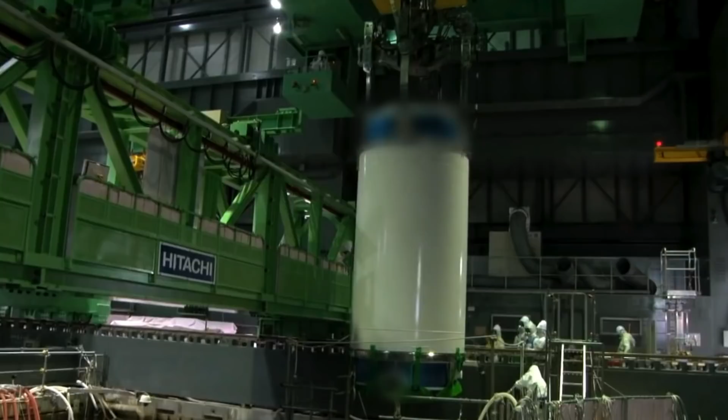That same type of reactor exists in maybe 23 other places in America alone. So you don't even have to film it there - you could film it in America, or in Japan, which has a bunch of them too. These GEs are all over. You could make this film almost anywhere.

And then, green screens. CNN is like the green screen king. Anderson Cooper has done green screens before, and they've been caught. So it's really hard to believe things you see, especially with people in places.

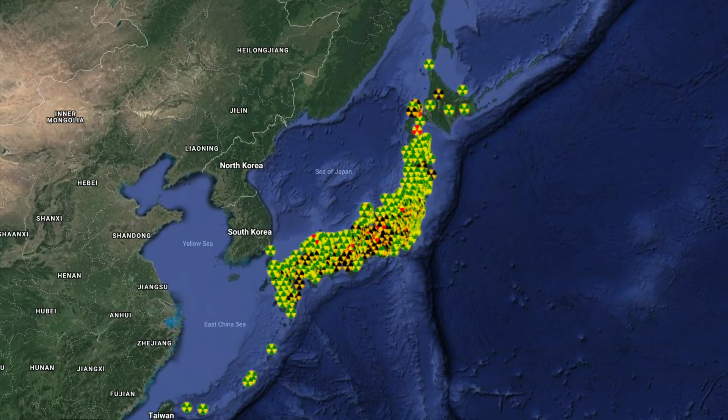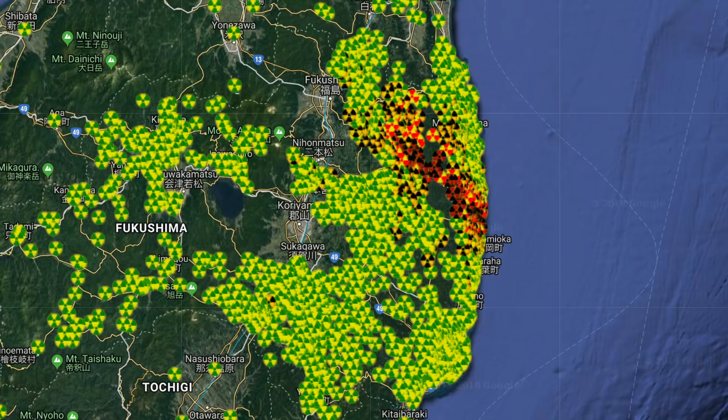The place exploded and blew up. When you have that type of meltdown and disaster, you're not going to go into it right away. They're still cleaning the place up, and there were all types of temperatures and different isotopes involved. They picked up isotopes miles and miles away from Japan that would require Celsius scales of 4,800 degrees - we're talking full-blown meltdowns, not to mention all the alpha and beta particles, even the low-temperature isotopes, which blew all over America. They just happened not to test the sensors until their half-lives were over, because they all had short half-lives.

So I have a hard time believing they're actually in that reactor. I believe it's either green screen, or let's say they made a mock-up and fixed it - why would they do that? There's no reason to set that up with fake fuel rods. Seriously, fake fuel rods - they're not going to do that. They'd just go to another room.

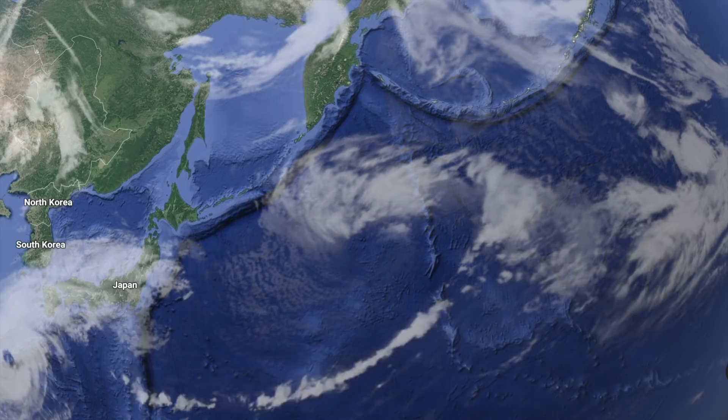These producers and news people have no empathy. They're paid to say certain things, and if they don't say what they're paid to say, they won't have a job. They say what the teleprompter tells them, and they have no problem with that. So I have a hard time with some of the footage on mainstream media.

Actually it doesn't even matter - I think what they're trying to do is distract you with this. The real problem isn't this at all. The real problem is that the place was built into a hillside. Seriously, who would build a nuclear reactor facility at sea level? You have to be kind of a moron to do this.

All that water's coming through that mountain - where do you think it's going? Underneath it. And what's down there? A bunch of melted cores. These things are melting, and the water's getting radioactive. The fish are all dying.

They don't report on all the dead whales. This week alone, there were a couple hundred dead whales in New Zealand. What about the 10,000 dead sea lions? Nobody talked about them. They don't show you all the dead fish, the die-offs, and I'll bet there's hardly any fish near Fukushima. Millions of gallons of radioactive water are continually seeping into the Pacific.

That's the real problem. And another problem is that they totally annihilated us with a plume - a gaseous radioactive substance that dropped all over America that they didn't even properly monitor. Half the monitors were turned off, and the mobile monitors just happened to be in the shop.

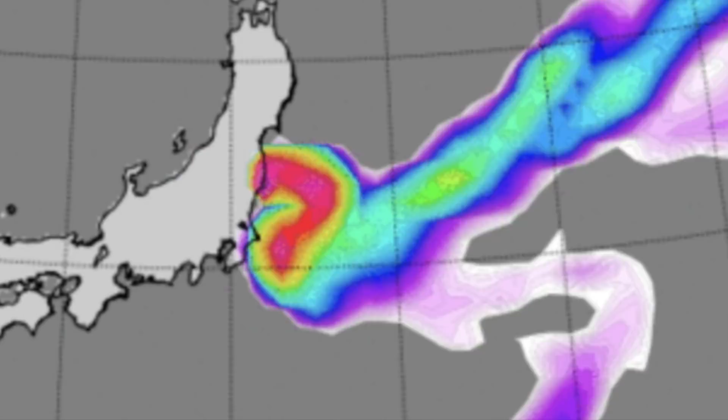And then they took out all the filters, and these filters were actually picking up the alpha and beta of iodine, plutonium, and other isotopes with half-lives of 30 to 60 days. They didn't test those until like 6, 8, 10 months later, when there was nothing left of the isotope. In the meantime, our cows ate the food, we drank their milk, we ate their food, because it all dumped on us.

That's the real problem - it's not this reactor TV show they're showing us. The real problem is that it's destroying the Earth right now, destroying our ocean right now. We were test specimens in 2011 and 2012, and all of America and Canada were hit by alpha and beta radioactive radiation that damaged us. That is the real issue.

As far as the rods, seriously, a lot of things could have happened. Number one, they could have just totally vaporized. They found certain isotopes that require 5,000-6,000 Celsius degree temperatures miles and miles away, so they could have just vaporized. By the way, when they vaporize into a gaseous state, a lot of these sensors we have all over, especially in America, don't pick up the radioactive gas. They pick up the particles that actually hit them. So it could have vaporized, okay?

And if it didn't vaporize, then they melted. If they melted, where are they? Well, they could be in the earth melting right now. There could be this big, massive glob of metal, radioactive substance that's trying to be cooled down by millions of gallons of water coming from the mountain, because these idiots put a nuclear power plant at sea level that cut a mountain out. All that water's going underneath, killing the fish like we talked about. So that's where your rods are at.

What do you think, they'd put them somewhere into another reactor? Well, if they did, they would say we're storing them temporarily. I mean, they don't even have any room to store stuff. Why do you think there's 31 million bags of 1-ton bags all over the country? If they had room to store rods, they'd be on site. No, man, these rods are gone. They've been vaporized, or they're in the ground melting, or they're hiding them somewhere and basically killing people with the radiation. Have you seen how many people are working there? I hate to see the death rates 10 years from now from all the workers there. It's insane.

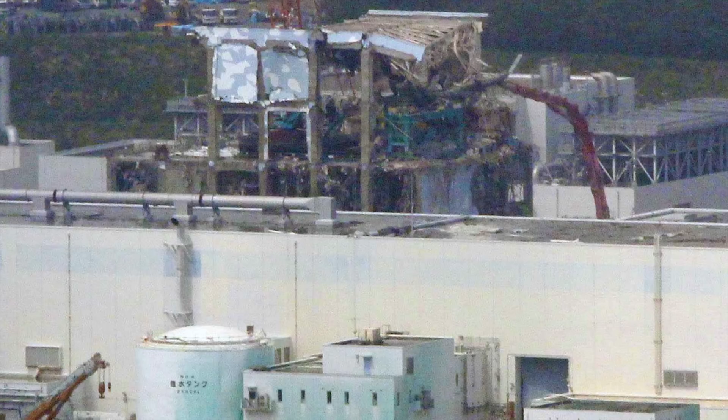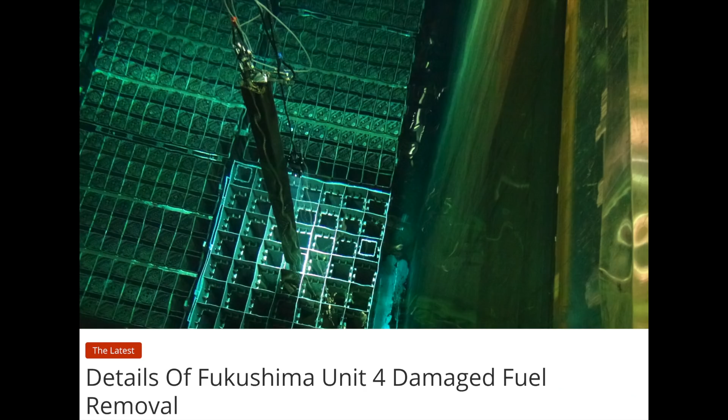It's insane. There were hydrogen explosions at reactors number 1 and number 3, and there was a fire at reactor number 4. There is no mistake that this is a level that can have an effect on humans. A fourth reactor is also right now under concern. This reactor was shut down at the time of the earthquake. What we believe at this time is that there has been a hydrogen explosion in this unit due to an uncovering of the fuel in the fuel pool. We believe that secondary containment has been destroyed, and there is no water in the spent fuel pool. Let me assure you, the situation is under control.

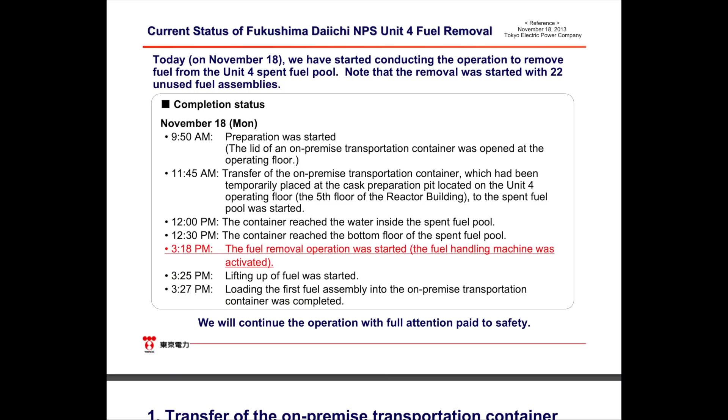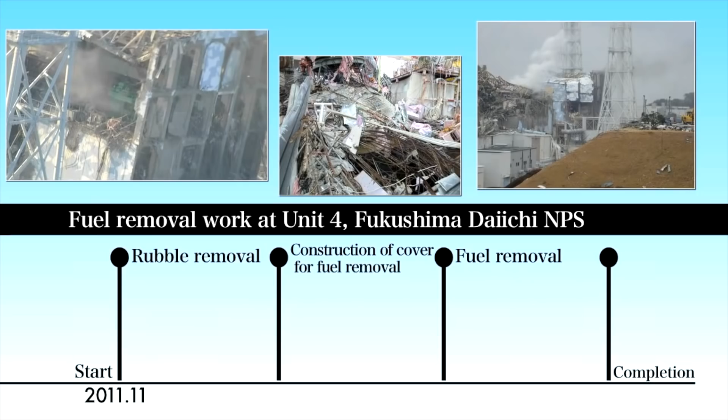December 1st, 2018. This video is called Fukushima Unit 4 Spent Fuel Pool Charade. Now, the reason why I call it a charade is, just look at the definition. All I gotta say is, do you believe TEPCO, or don't you believe TEPCO? I don't believe TEPCO. And if you don't, then I ask the question: if the spent fuel pool caught fire, even a little bit, how do you pull out spent fuel rods that were on fire? Wouldn't they be stuck together?

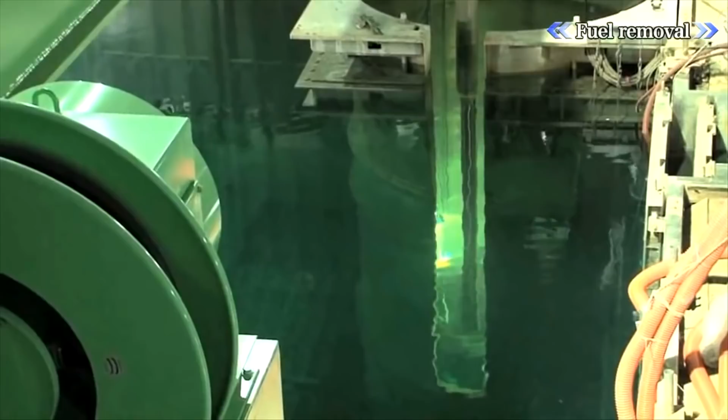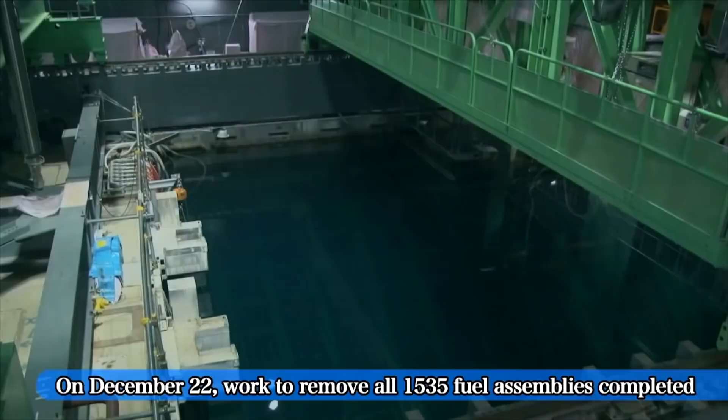Now, they say 100% of it went up into the air, according to the censored report. Now, if it's all gone and burnt up, why are they saying that they pulled 1,500 of them out? And if they did, where are they?

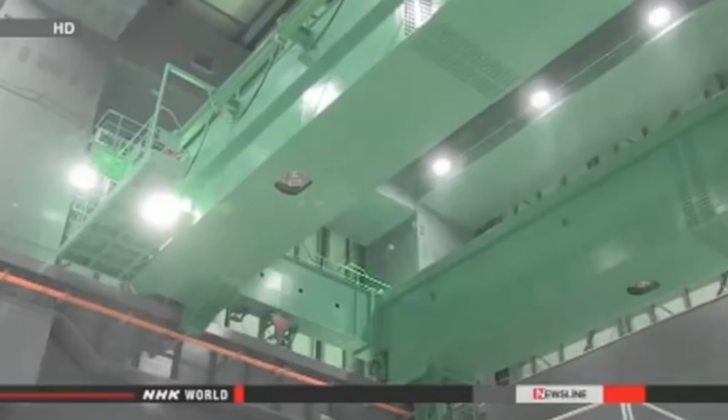Workers will begin removing fuel rods on Monday at the Fukushima Daiichi nuclear power plant. This is the first critical step in what is to become a decades-long decommissioning process. Tokyo Electric Power Company workers will launch the operation from the number 4 reactor building. There are more than 1,500 assemblies of fuel rods in the building. Most of them are used and highly radioactive. The building was damaged by a hydrogen explosion in March 2011. The workers will use a crane attached to a specially built structure. Each worker is only allowed to work for 2 hours a day because of the high radiation levels in the building. A manager told NHK World that TEPCO is confident the operation can be carried out safely. The same operation has been conducted more than 1,200 times at nuclear plants, including other facilities. We're not trying anything new. Experienced workers will do what they have been doing for years. TEPCO officials say it will take more than a year to remove all the fuel rods from the building. The workers will then have to remove the fuel rods from 3 other reactor buildings. They estimate that the entire decommissioning process will take up to 40 years.

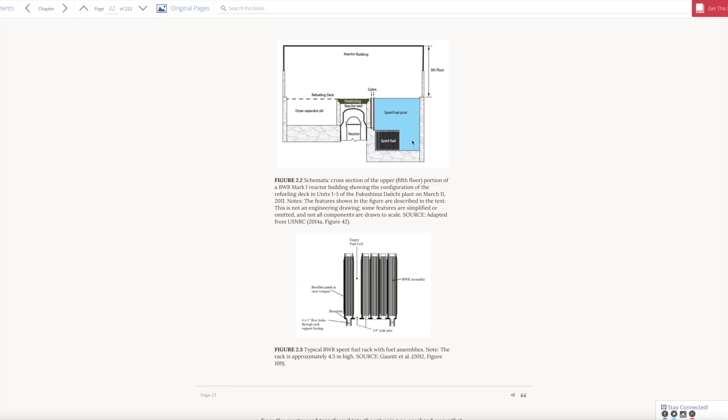It states that TEPCO did not provide enough technical documentation for its water level estimates in the Unit 4 spent fuel pool to enable the committee to evaluate whether those estimates are realistic. In particular, there was insufficient information about the methods used to establish water leakage around the gate seals and total volume of leakage from the pool. These leakage estimates are critically important for obtaining realistic estimates of pool water levels.

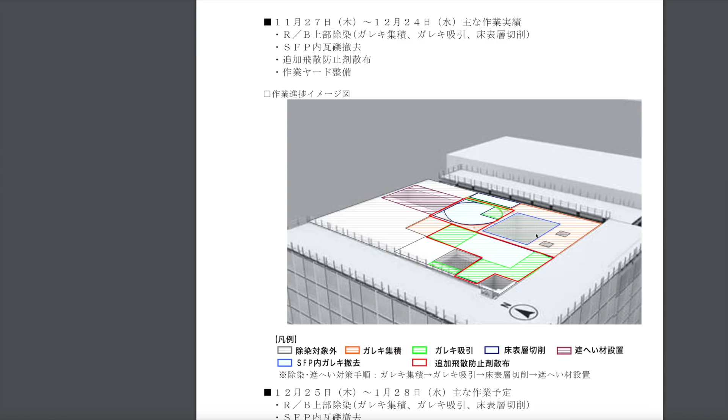This is their image of June 29th, 2011 of that spent fuel pool. This is the location of the spent fuel pool. This is headed north. Right there, every wall in the whole building is blown out.

International Atomic Energy Agency, on March 15th, 2011, was informed by the Japanese authorities that the spent fuel storage pond at Unit 4 of the nuclear power plant is on fire. They're stating it's on fire, the storage pond.

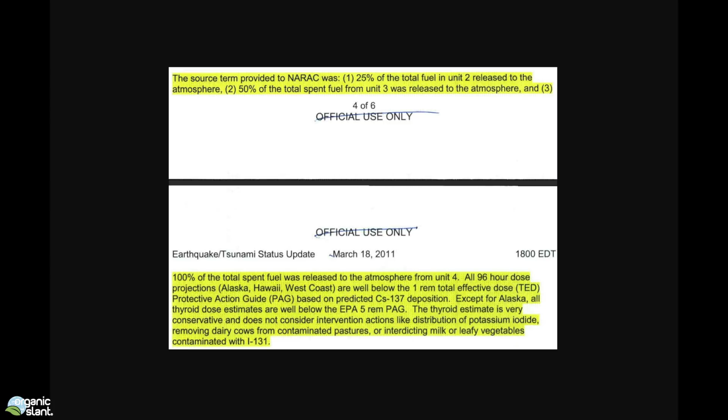According to a now declassified report written by the U.S. Nuclear Regulatory Commission on March 18th, 2011, one week after the tidal wave hit Fukushima, they're saying that 25% of the fuel in Unit 2 was released, 50% of Unit 3 of the total spent fuel was released, and 100% of the total spent fuel was released to the atmosphere from Unit 4. Now you know why there's so much confusion over here. All these documents are saying that the spent fuel storage pond went up in fire. It caught fire. That thing would be burned to bits.

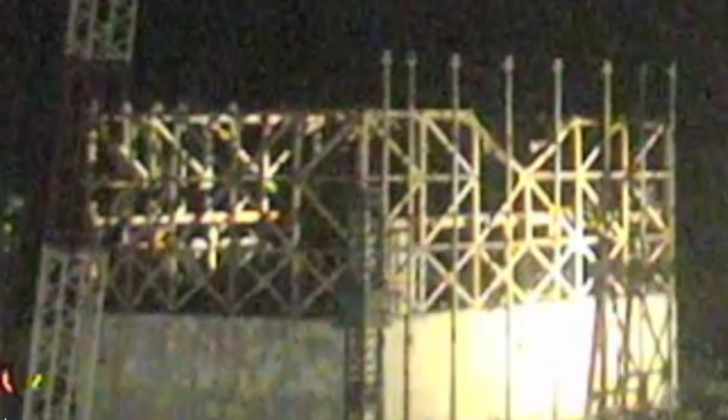Reactors number 3 and 4 had low water levels. Spent fuel pools are of significant concern. Reactor number 4 had 135 tons of nuclear fuel in it. March 15, 2011, fire in the spent fuel pool in Unit 4 at Fukushima 1.

In the early morning of Tuesday, 15th March 2011, the International Atomic Energy Agency released a statement saying that the Japanese authorities had informed the agency that the spent fuel storage pond at Unit 4 of the Fukushima Daiichi plant is on fire and radioactivity is being released directly into the environment. No nuclear fuel was in the Unit 4 reactor on 3/11.

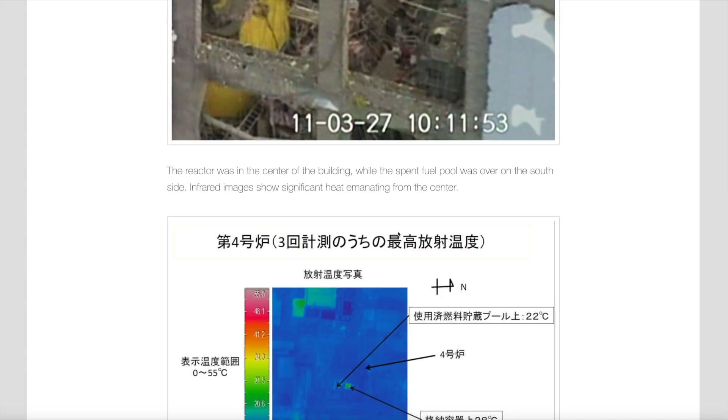Now, this person is saying that there is evidence that it was full of fuel at the time of the explosion. Oh look at that, that's a doozy. Now, this is the only theory I've ever heard of this.

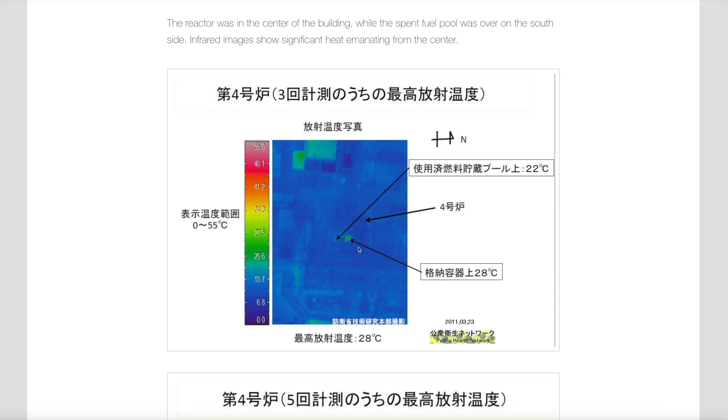There is the hot spot right here. Now, the fuel pool is more towards... that's what this person is trying to say, that...

I have confirmed that there is no fuel in Unit 4 pool, even the U.S. military. Concern is that Unit 4's pool has been dry for a really long time. If it hasn't done it already, it'll eventually melt through the concrete floor, drop down, hit the Torus, possibly steam explosion.

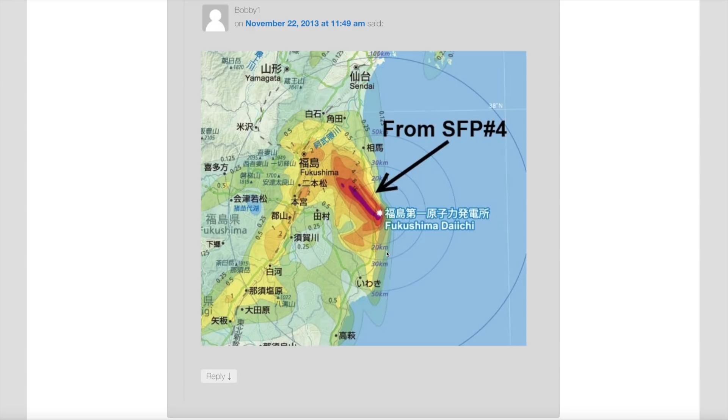Now this is really interesting. I found this tweet that says even the U.S. military has confirmed that there is no fuel in Unit 4 fuel pool. Now, I don't know what that means.

Now, if they mean no fuel, does that mean that it's all burned up? Which is reported - reporters who questioned the transparency of the water in Unit 4 pool as unusually high at the TEPCO interview. Well, they just keep repeating it. Does that mean the IWJ was also taking a farce shot? Unit 4 spent fuel pool.

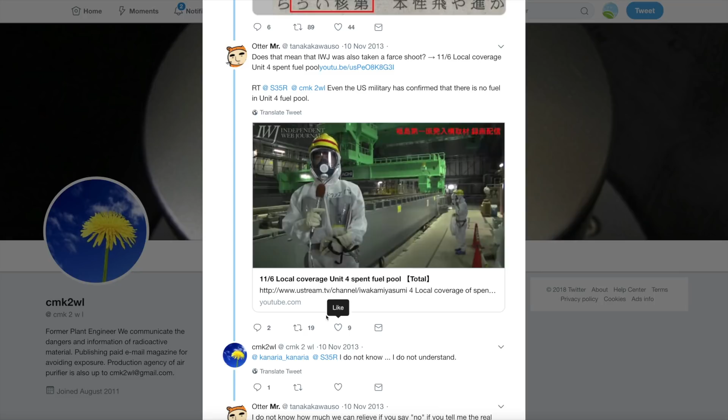I don't want to yell here, but this is weird, this is totally fake. If you look at every video of them going into Unit 4 - Leslie, all of them, the Cecilia Vega, the BBC guy - you look at every one of those, watch what happens. They always go to the floor, and then there's the shot that opens into this number 4 building. Now, I've never seen this video before, but this totally cements it right now that it is a farce, and I will show you what I'm talking about.

Watch. When they go into the building, they go right down to the floor, and voila, then they're there. Watch this. That is so staged, it's pathetic.

Alright, now this is the mock reactor then. I am believing that this is the mock reactor, that even the BBC's Rupert - he says that they built the top in 6 to 9 months. So why couldn't they build this in 6 to 9 months? The whole fake reactor.

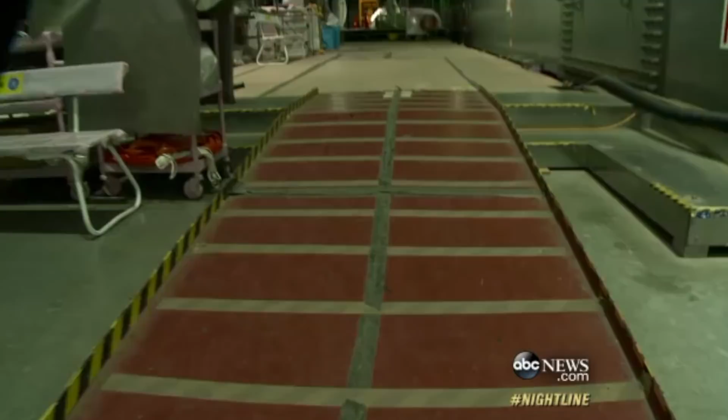Don't you find it bizarre that all the reporters follow the same protocol? Now watch Cecilia Vega - the camera goes down, and then they appear inside. Every video shows the same way into the building and out.

And now I understand why, because Unit 4 does not contain anything. Even listen to what they say throughout this whole thing - they say that the levels are not as low in 4 as the other 3. That's because there's nothing in there.

We're going to go inside and see what kind of progress TEPCO has made on this cleanup. We're inside the building for reactor 4.

Now look what happens when she goes into the building. I think they're using a different camera too - look up in this part right over here. Something weird is covering the lens. This is not - they're not going to use the same camera, so something is a little bit fishy with that. Watch.

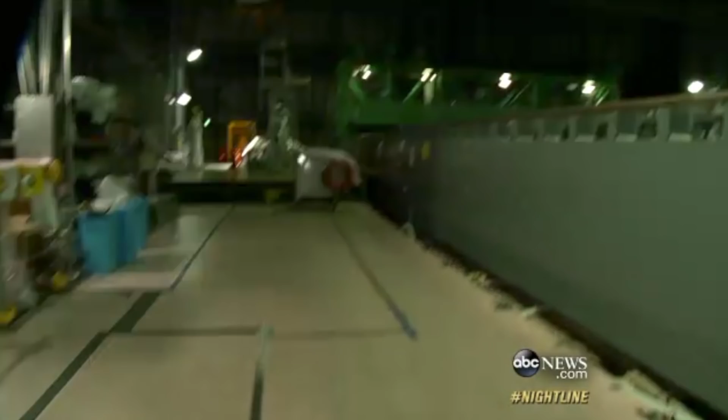See this up in here? This black part? Something's fishy.

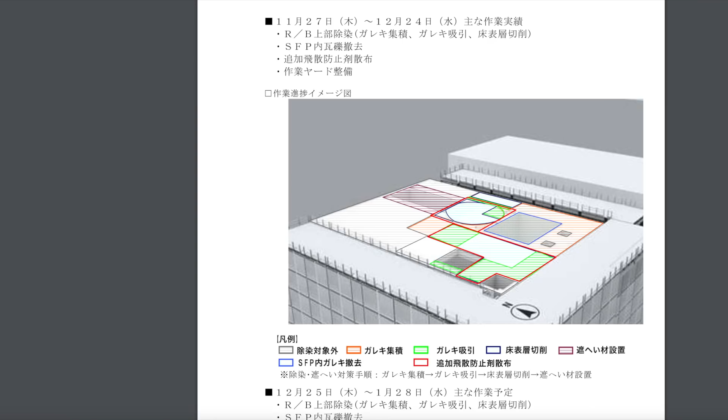TEPCO says another fire burning at Unit 4 on the northeast corner. Helicopter being prepared to fight the fire. Okay, northeast corner - north, south, east, west. Northeast corner is right in here.

State Department has confirmed fire on Unit 4. TEPCO is saying they haven't yet started fire extinguishing the Unit 4 fire. Fuel rods have been exposed and generating hydrogen in Unit 4. Some of the roof is damaged. 30 rems an hour in the area, so it's difficult for personnel.

TEPCO is saying they haven't yet started fire extinguishing number 4. Fire on Unit 4 is being reported as fire that may have initiated due to hydrogen gas from low levels of water in spent fuel pool. No indication what is burning. Media indicates fire started and being reported by a TEPCO person that they are not taking actions to extinguish it at this time due to dose rates in the reactor building. Fire about 5 hours ago in Unit 4, low in the reactor building.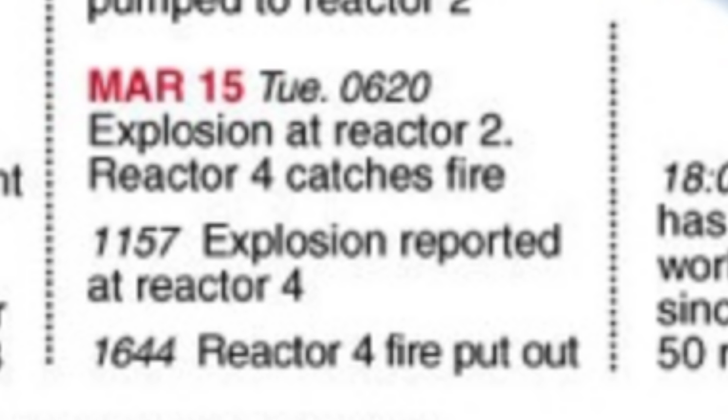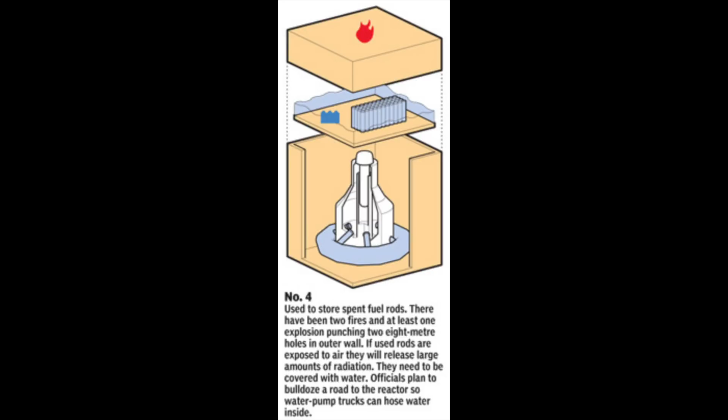Long-lived radionuclides, such as cesium-137, are something new to us as a species. They did not exist on Earth in any appreciable quantities during the entire evolution of complex life.

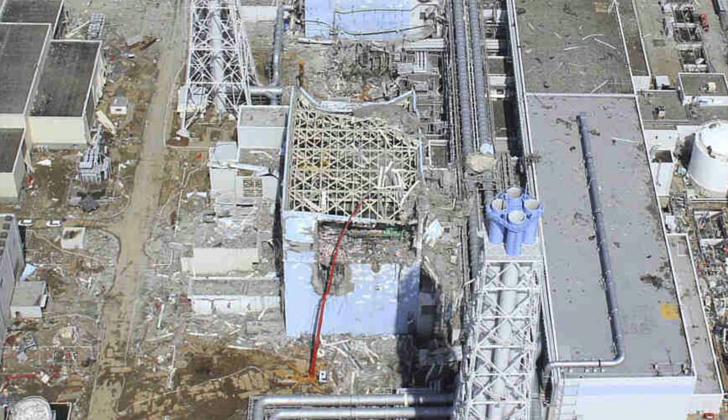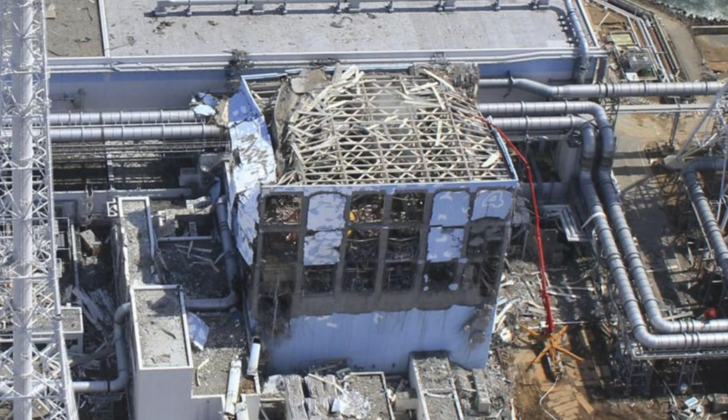Although they are invisible to our senses, they are millions of times more poisonous than most of the common poisons we are familiar with. They cause cancer, leukemia, genetic mutations, birth defects, malformations, and abortions at concentrations almost below human recognition and comprehension. They are lethal at the atomic or molecular level.

They emit radiation, invisible forms of matter and energy that we might compare to fire, because radiation burns and destroys human tissue. But unlike the fire of fossil fuels, the nuclear fire that issues forth from radioactive elements cannot be extinguished. It is not a fire that can be scattered or suffocated, because it burns at the atomic level. It comes from the disintegration of single atoms.

Thus, radioactivity is a term which indicates how many radioactive atoms are disintegrating in a time period. We measure the intensity of radioactivity by the rate of disintegrations and the energy they produce. One becquerel is equal to one atomic disintegration per second. One curie is defined as that amount of any radioactive material that will decay at a rate of 37 billion disintegrations per second. So one curie equals 37 billion becquerels.

My name is Martin Fackler. I'm the Tokyo Bureau Chief, and the title, as we just heard, was Challenges and Opportunities After the Fukushima Nuclear Disaster, this crisis management, and the question of what do you tell your public. Do you tell them that there's a serious nuclear accident, or do you play it down? Do you try to cover it up?

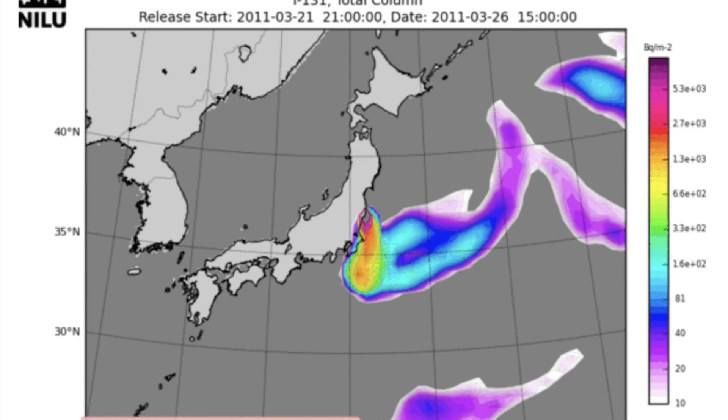A new computer simulation shows how radioactivity is spread around the world. That simulation is based on the scenario in which contaminated air was vented from the disabled number 2 reactor building on March 14th, 3 days after the massive earthquake and tsunami. Computer images showed the radioactive material was lifted 5,000 meters into the air. It was then carried by westerly winds and spread over the Pacific Ocean. The images indicate that on the 4th day after being vented, the substances reached the west coast of the United States, and on the 7th day, they approached Iceland after crossing the Atlantic.

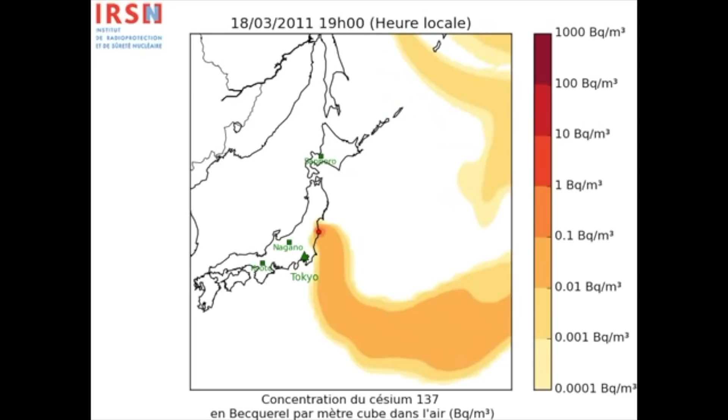Unit 3, do you think Unit 3 had a nuclear explosion? We're not going to split hairs over that stuff, because it blew pieces of the rods up to a couple of miles away.

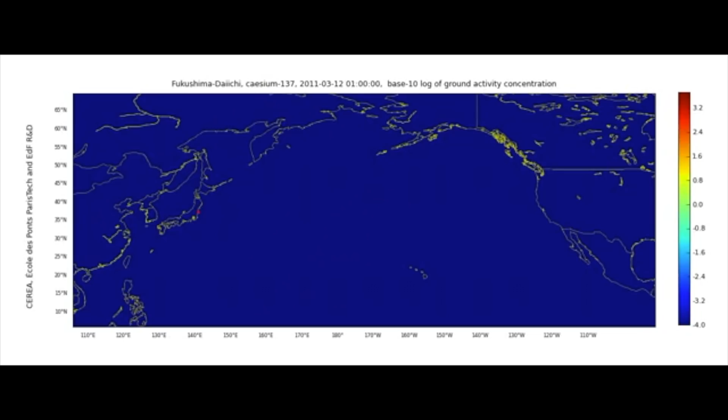Once again, this is only based upon a short release from a single reactor at Fukushima, and as I just showed you, all the reactors had releases. Now, the first 100 hours, that was 120 billion becquerels, just out of that one reactor, see? That's the importance of it. Now I'm going to move up to Unit 4.

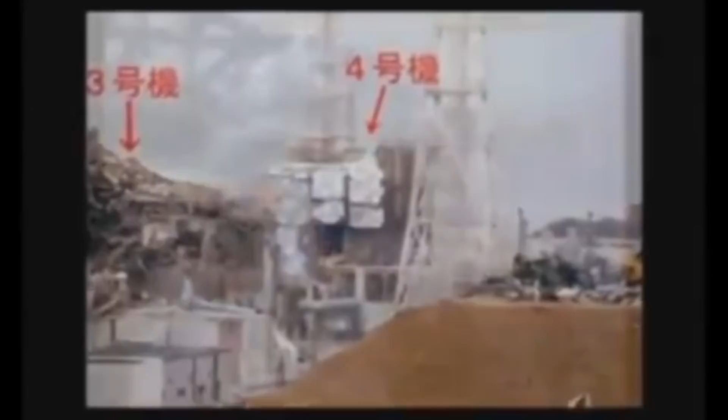It's unknown how great that containment breach is, but it's a very bad thing, and plant worker evacuation began. On that same day, the Reactor 4 building, which is adjacent to Reactor 3, was observed to be aflame. And this was sort of at the same time that radiation levels were increasing further.

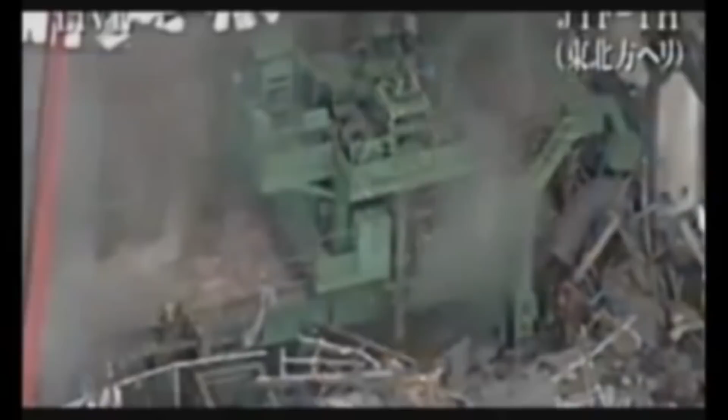There was a lot of suspicion that this fire was in the spent fuel pool. However, since that time, TEPCO has said that there was an oil leak in a water pump, and that was what caused the fire at Reactor Building 4. By the way, these fuel pools are 40 feet deep. They're in the reactor buildings, but they're outside the containment. It's okay for their water to boil, but the elements must remain covered. If they uncover, they're likely to overheat.

TEPCO says that the fire was extinguished at noon, so that's not very long after. IAEA says that they were informed that the fire was extinguished at 5 o'clock in the afternoon. So that's really where things stand. Now Unit 4, that's the one you see straight ahead of you, that detonated. You just heard MIT talking about how it detonated, and was on fire, and everything else.

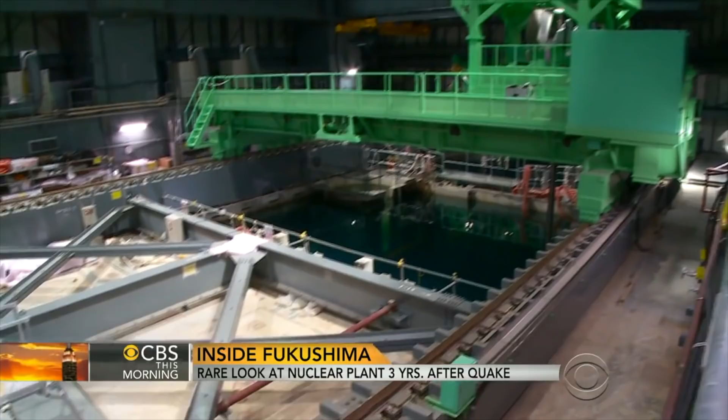I want you to listen to CBS's Seth Doane. He claims he's inside the same building that you're looking at right now, the heart of the decommissioning work taking place here in Reactor 4.

At the end of our tour, we were checked for radiation exposure. In 4 hours, I received the equivalent of less than a chest x-ray. Now, you can't get less than a chest x-ray, okay? Because you're ingesting radioactive particles. You get an x-ray every second of your life.

Now, what you're looking at right now, he claims that's inside of there, that those fuel pools are the same. Somehow that fuel pool and this fuel pool can magically exist inside of this, or per se inside of that.

Now, you won't see any scaffolding. You're not going to see anybody with cutting torches. You're just going to see Seth with these magic pictures and a roof that looks like Molly Maid put it in there. And you can't get inside of these buildings.

And that's Unit 4, they're claiming. And they're also claiming that's Unit 4. What's going on here? They came out in the last couple of months, CBS, CBC, ABC, BBC, everybody, and claimed that Unit 4 was pretty, it was gorgeous. But in reality, it's extremely destroyed.

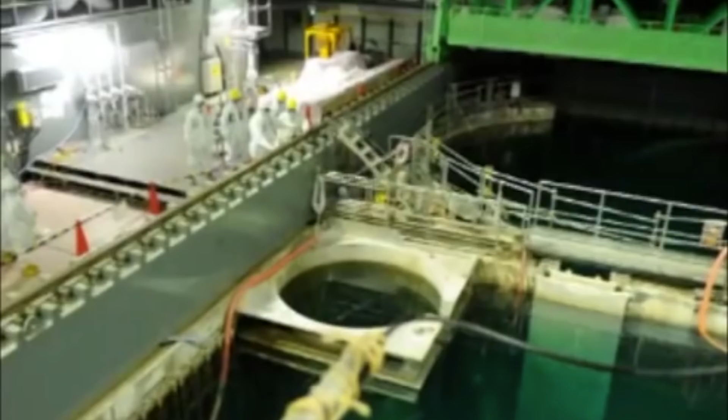Becquerels can be counted in living persons because cesium-137, the decay of cesium-137, emits gamma radiation, which passes through the body.

After many months of decontamination and decommissioning work, TEPCO has reached an important milestone: the successful removal of all fuel assemblies from the Unit 4 reactor building spent fuel storage pool. The work was completed on December 22, 2014.

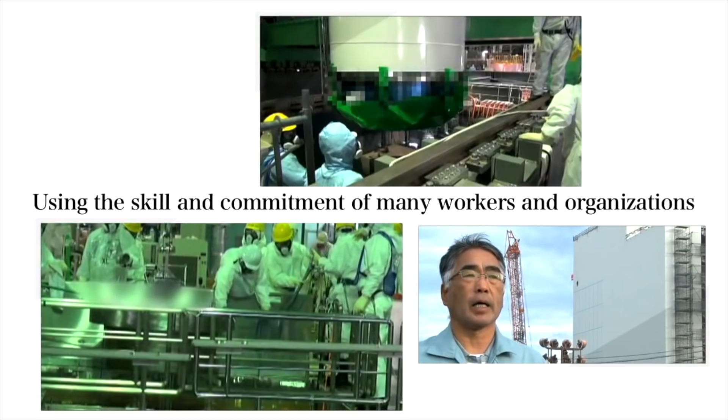It is the skill and commitment of our engineers and workers at every level, and of the many other organizations in Japan and from around the world, that enabled TEPCO to meet this challenge.

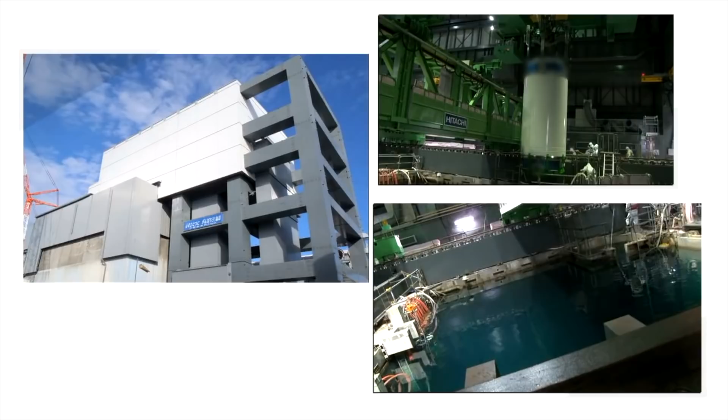The successful completion of the removal of fuel from Unit 4 allows us now to turn our attention to the challenge of removing fuel from the other reactors, Units 1 to 3. With the benefit of the experience at Unit 4, TEPCO will be able to achieve the task even more safely and efficiently.

There are essentially 4 reactors that we are currently monitoring as best we can. They are all at the Fukushima #1 site. Three of those reactors were operating at the time of the earthquake and were shut down following their normal procedures. We believe that in general for these 3 reactors, they have suffered some degree of core damage from insufficient cooling, caused ultimately by the loss of off-site power and the inability of the on-site diesel generators to operate successfully following the tsunami. We also believe that seawater is being injected with reported stable cooling. The primary containment is described as functional. I would also note that for Unit number 2, we believe the spent fuel pool level is decreasing.

For Unit number 3, we believe that the spent fuel pool integrity has been compromised, and that there has perhaps been a zirconium-water interaction.

In addition to the 3 reactors that were operating at the time of the incident, a 4th reactor is also right now under concern. This reactor was shut down at the time of the earthquake. What we believe at this time is that there has been a hydrogen explosion in this unit due to an uncovering of the fuel in the fuel pool. We believe that secondary containment has been destroyed, and there is no water in the spent fuel pool. We believe that radiation levels are extremely high, which could possibly impact the ability to take corrective measures.

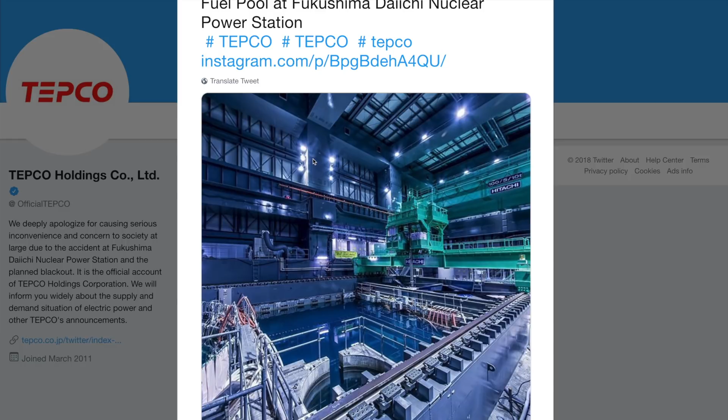I mentioned earlier that the reactor building for unit number 4 was very much destroyed, and the spent fuel pool was exposed to the air and sort of hanging in midair. In the spent fuel pool for reactor number 4, which was completely exposed to the air, there was enough cesium-137 equivalent to 14,000 bombs that were dropped on Hiroshima. I'll say that again — there was enough cesium-137 in the spent fuel pool equivalent to 14,000 atomic bombs, like the ones dropped on Hiroshima.

There was a danger at that time that the spent fuel rods in that spent fuel pool, because they were still continuing to emit heat, would eventually cause all the water in that pool to dry up.

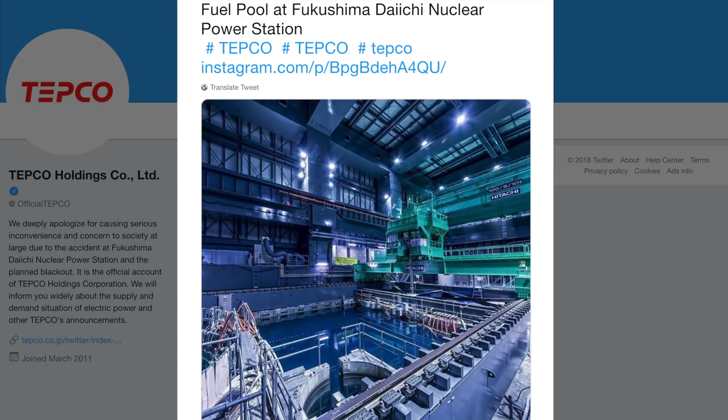And if the pool water would all dry up, that would create a situation where the spent fuel rods would begin to melt themselves. And that would create a terrible situation where probably people in the Tokyo area would have to evacuate as well. This is not just my personal opinion, but it was actually the opinion expressed in a report by Mr. Kondo, who was the head of the Nuclear Energy Commission at that time.

I think many of you journalists in this room may remember that there were some days immediately following the accident where we had self-defense forces helicopters fly above the power plant to drop water onto the plant. And also we had members of the Tokyo Fire Department bring very long hoses and try to put water into the plant. But actually what they were focusing on was unit number 4. They had to somehow keep that spent fuel pool filled with water. If they were not successful, they thought Tokyo could be destroyed.

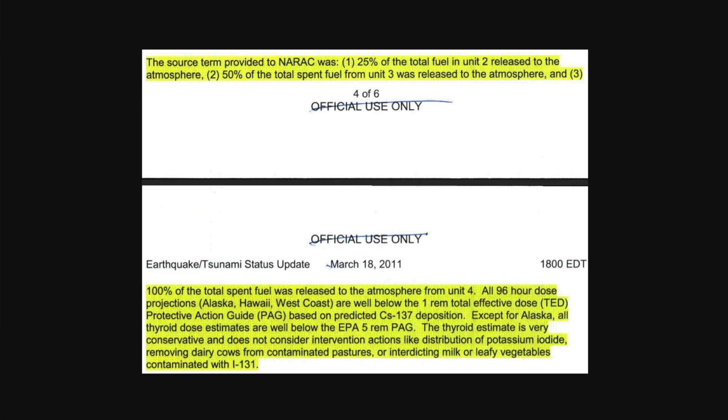So things have continued at Fukushima Power Plant for the last 4 years, and some progress, some not. But you may remember that in 2011, the party in power was the Democratic Party of Japan. You may also recall that in December of 2011, the Prime Minister at that time, Prime Minister Noda, made an official declaration that the accident at Fukushima Nuclear Power Plant number 1 had been brought to a close. The Japanese term is shusoku shita. My reaction on hearing his words was, stop kidding.

The reality is that even though 4 years have passed, the accident situation has not yet been brought to a close at all. As I said earlier, the biggest danger that everyone involved was aware of was the fact that unit number 4, the spent fuel, although it was not operating at the time of the accident, the greatest danger lay with unit number 4, this spent fuel pool.

As I mentioned earlier, there was a great deal of cesium, 14,000 times the amount of the bomb that was dropped on Hiroshima. That cesium was simply sitting in that pool, and if that cesium were to be released into the air, then that would be the gravest danger that could be presented to Tokyo and to Japan. This was a crisis situation. Something needed to be done about this, and everyone at TEPCO and everyone at the Japanese government knew how serious this situation was, and they truly made efforts to try to deal with this situation.

But it was not until November of 2013 that finally the process of removing those spent fuel rods from the spent fuel pool at unit number 4 was begun, and it took about a year. It was not until November 2014, a year later, that all of the spent fuel rods were extracted from the unit number 4 pool and moved to a slightly less dangerous common spent fuel pool nearby.

I was so grateful and glad that this work was finally done and finished. I was relieved because I thought at last the possibility that Tokyo might have to be abandoned suddenly has at last been cleared. We've been able to discard that fear. Having said this, however, although this terribly great danger was somehow at least overcome for the time being, that does not mean that we're out of a crisis situation at all.

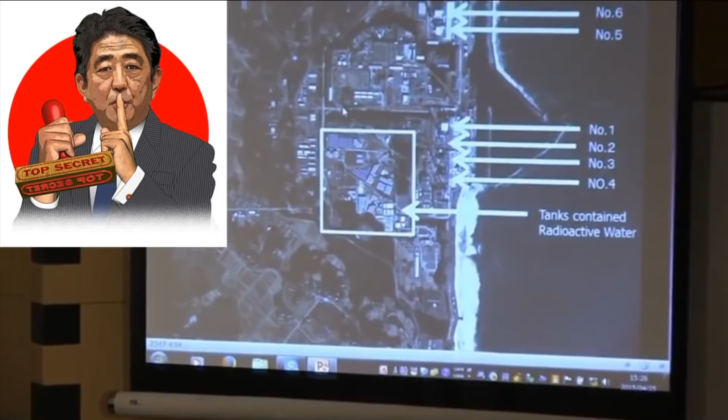So this is an aerial shot. You can see units number 1 to 4 on the southern part of the slide, and then up above you have number 5 and number 6. Reactors number 5 and 6 don't come into the news very much. They were very fortunate because one emergency generator managed to operate that day, so there was no meltdown of the core. However, as you can see, reactors number 1 to 4 have had all of these different problems, and a great deal of radioactive materials were therefore emitted into the air.

Not only this, as I mentioned earlier, they constantly have to be kept cool. As a result, contaminated water is being produced in great amounts each day, and it is being put into, as you can see in that little square, these tanks. It was TEPCO's idea to somehow contain this water into these tanks.

Already 500,000 tons of contaminated water are in these tanks. Although TEPCO is working hard to build tank after tank after tank, there is a limit to how much physical space is available on this site for building tanks. So I think in the not too distant future, TEPCO will have to make a decision and say that it will start releasing some of the contaminated water into the ocean.

I should also point out that these tanks are not really permanent, solid tanks, but rather provisional, temporary tanks. The reason is that if one were to try to build more sturdy, permanent tanks, the workers would be irradiated even more during that process. There would be too much exposure to radiation, so they have to simply manage with the tanks that are available. However, because they were not designed for such long usage, we're seeing all sorts of leaks occur from time to time.

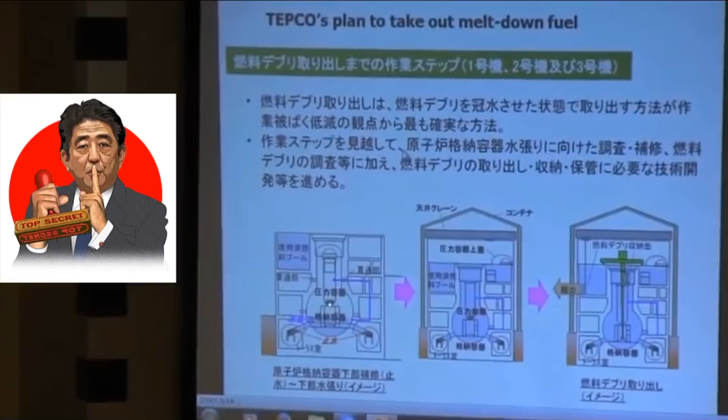Apologies for this slide being in Japanese. It's actually a slide presented by TEPCO, presenting their plan for how they will pluck out the melted fuel.

As was just explained, on the left-hand diagram, in the very center you have the pressure vessel, and surrounding it you have the containment vessel. TEPCO is saying that inside the pressure vessel, the smaller part at the top, you have the melted fuel at the bottom, and they believe the melted fuel has gone through the bottom of the pressure vessel and all the way down to the floor of the containment vessel, sitting there like a big lump.

So you have that test tube-like round object that he was just pointing out, which is the containment vessel. The containment vessel was supposed to be the last fortress of defense to protect people from radiation. However, it seems there has been damage to the containment vessel, because no matter how much water you pump in, it keeps not filling up.

As the professor has pointed out, at the bottom of the smaller pressure vessel and at the bottom of the larger containment vessel, TEPCO believes there are lumps of melted fuel. Their idea is to insert something from the top of the pressure vessel, go all the way down to the bottom of the containment vessel, and pluck out all of these lumps of melted fuel.

However, if they were simply to try to remove the top of the pressure vessel in a dry state and put something inside, the moment they opened it up, a huge amount of radioactive materials would be emitted into the air. Nobody could go even close.

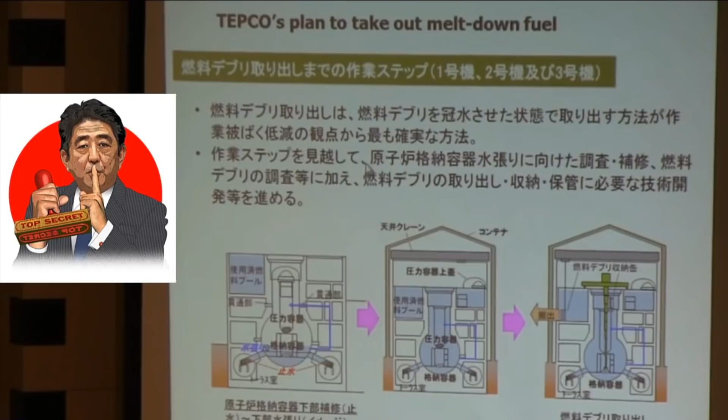But I believe this plan is simply impossible to realize. First of all, the containment vessel does have holes, and we don't even have the technology or ability to determine where those holes are. And even if we could determine where the holes are, how can we possibly repair them? We do not have the means to do so, I believe.

I also think that if, hypothetically, one were able to repair the sides of the containment vessel and successfully fill it with water, then even if you tried to pluck out the melted fuel from above, the fundamental assumption of TEPCO and the government—that the melted fuel is sitting at the bottom in a nice little lump like a dumpling shape—I think that is impossible.

It's an impossible proposition. Although this picture looks like a neat situation where all the spent fuel is put nicely into two little lumps, when one considers the severity of the accident—the explosions, the shaking, and all the damage that occurred—I cannot imagine that every bit of that melted fuel is sitting nicely in one lump. Rather, it will have spread all over the place, and not only horizontally—some of the spent fuel could have gone through the floor of the containment vessel as well.

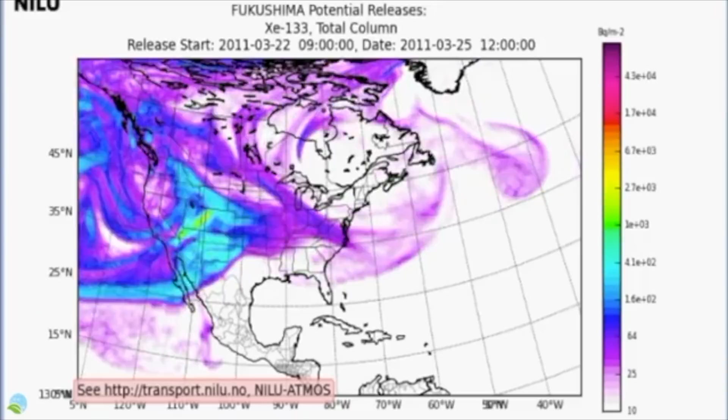We are here inside Reactor 4 at the Fukushima Daiichi nuclear power plant, severely crippled during the earthquake and tsunami of 2011, leading to the country's worst nuclear disaster. It was in here where there was that massive hydrogen explosion. The decay of cesium-137 emits gamma radiation, which passes through the body.

Not one inch of skin exposed. The danger here: radiation you can't see or smell, which passes through the body. The threat is all around me. This is Japan's Fukushima Daiichi power plant. It's really eerie to be here right now, the site of one of the worst nuclear catastrophes in history.

The closer we get, these radiation readings are just skyrocketing. Now, at the start of an unprecedented and treacherous cleanup, TEPCO has agreed to open its doors and show us the progress they've made. This is Unit 4 right here, the gray one. As we get closer, these radiation detectors get higher. We're going to go inside and see what kind of progress TEPCO has made on this cleanup.

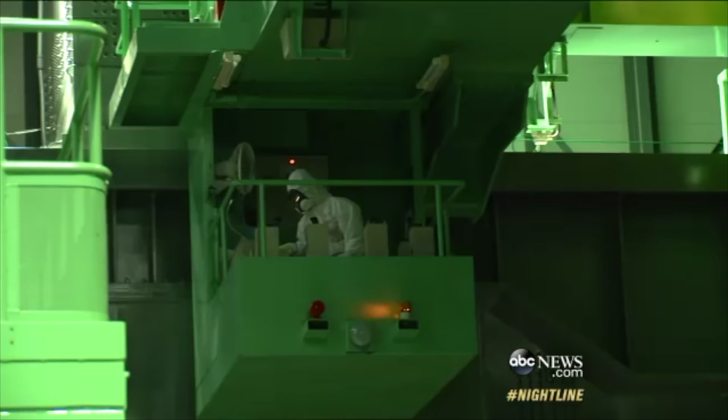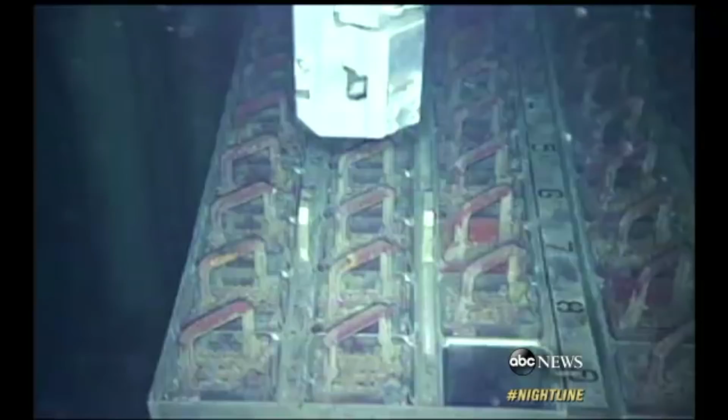We're inside the building for Reactor 4. The world is watching, and many fear what lies beneath this murky water: 1,500 highly radioactive fuel rods inside this pool. They've got to move them outside of this reactor into a safer location.

Some say this is an exceptionally delicate, very dangerous dance for TEPCO. This is a vital first step to decommission the plant. In all, it will take workers an entire year just to clean up this reactor. But so far, they've done it safely.

We were granted rare access because TEPCO, the company that owns the plant, wanted to highlight its progress here after years of criticism. Finally, we suited up in protective gear for our carefully choreographed tour. This is the reinforced structure that was built around Reactor 4. The reactor was not in use at the time of the disaster, but a hydrogen explosion blew off its roof and sent debris flying into this pool filled with nuclear fuel.

It's here where TEPCO removed debris and is now starting to slowly retrieve the 1,500 fuel rod assemblies stored in this pool. It's a painstaking process that's essential to shuttering the reactor. All of this work is taking place underwater because the water acts as a shield for the radioactivity.

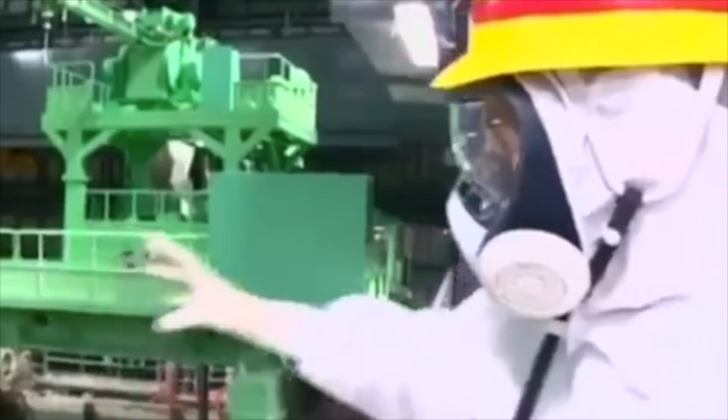A hydrogen explosion tore off the roof of this reactor. At the time, Reactor 4 was not in use, but that explosion sent debris and chunks of concrete into this pool where the nuclear fuel was being stored. We were able to watch the delicate and dangerous work of removing some of the 1,500 radioactive fuel rod assemblies. If the rods break, they could release more radioactive gases.

I've read an analogy that this is like removing a cigarette from a crushed pack. Take that analogy, TEPCO engineer Masayuki Ono told us, and imagine that it's like the cigarette in that box is lit. So you're saying it's even more difficult than that? I think so. Ono told us they've removed 15% of the fuel from Reactor 4.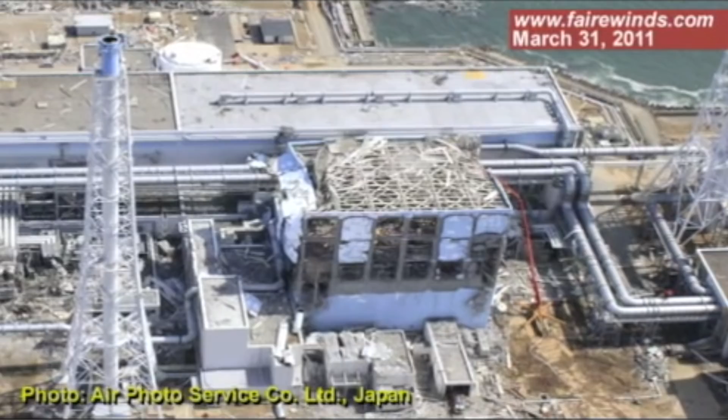Now, what happened at Fukushima was when the whole site lost power, at Fukushima 4, there was no reactor operating. All the fuel had been removed and was in the fuel pool. Normally the pools are cooled. However, they lost power, so there was no longer any cooling. It appears that the pools boiled dry. The roof blew off the building. That indicates that hydrogen was built up from something called the Zircaloy water reaction that had to occur at temperatures over 2200 degrees.

After that, the Fukushima staff has been attempting to pour water into that reactor. You can see in this picture that up the side of the building is a hydraulic device, actually designed for pumping concrete. That's pumping water up and over the roof and pouring water into the nuclear fuel pool.

Well, this picture is undated, but when it was taken, it clearly shows that there's no water in the pool. Now, if you look, there's a long green device, and that's the refueling bridge. Normally that glides along on rails above the pool, and the pool is that crystal clear water that you normally are used to seeing. Well, after the explosion, it has collapsed and is lying in the pool.

Now, between seconds 33 and 37 on this video, you can see little boxes, and the little boxes are just to the left of that green bridge. The boxes are in air. Those boxes are the top of nuclear fuel racks. They're supposed to be under 30 feet of water.

They're not. Now, what that means to me is a couple things. First off, the top of the nuclear fuel is exposed. Perhaps all the nuclear fuel is exposed, but certainly the top is. You can see steam coming up, but not from the top of the fuel. Down further in the cavity, there's steam coming up. So the water that they're spraying in is hitting the nuclear fuel and creating steam, but it's not filling that swimming pool. Now, the water has two purposes, cooling, but also shielding.

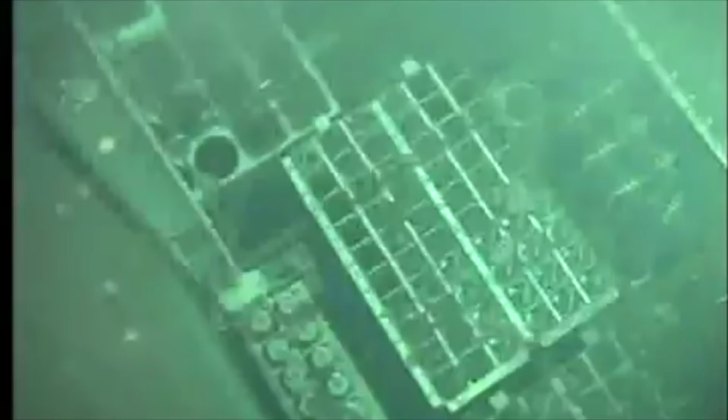So this is really why we've been brought here. Where I'm standing is on top of what used to be reactor building number 4. The whole of this building was blown apart by a huge explosion after the tsunami disaster. But down inside this pool behind me here is still a vast amount of nuclear fuel.

You can see it down there beneath the water. More than 1,300 fuel rods. Those have got to come out. They're currently 30 meters above ground level. This whole building is still not entirely stable, so they've got to get those out into safe storage.

The machine they're going to use to lift those fuel assemblies out of the cooling pool is currently being built over behind this white tank here. It's a very complicated piece of machinery which has to do a very delicate task to draw these fuel rods out of the fuel pool. They're going to be lifted on this huge crane that has been built over the top of reactor building 4.

Remember, this whole building was destroyed by a huge explosion. All of this around me here has been built in the last 6 to 9 months. And the reason why they can do this job here in reactor building 4 is because the radiation levels in this building are relatively low.

When we were back inside reactor building number 4, my radiation monitor was reading about 200 to 250 counts per second. But this behind me here is reactor 3, and as our bus drove past it, the radiation reading shot up to more than 2,500 counts per second. That's the problem. That building and the other 2 reactors are still too radioactive for anybody to go inside and start decommissioning.

I found on Twitter a poll on Unit 4 fuel pool. 91% out of 401 say that there is no nuclear fuel - it flew to the environment with the fire explosion - and only 9% say that the nuclear fuels were safely immersed in water.

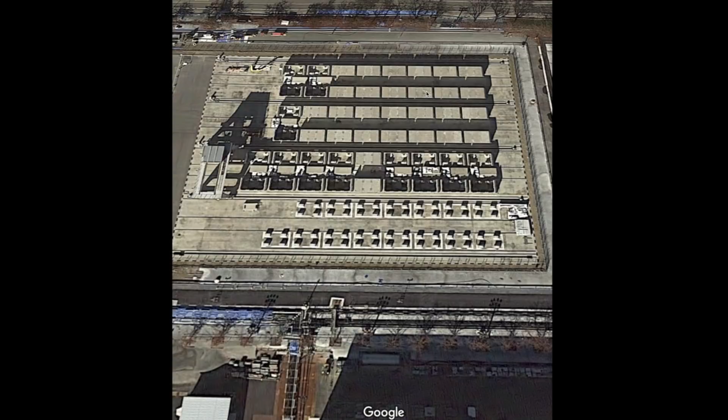And then also, this is where they ended up putting them - temporary storage in these buildings. The storage, with those fences around it, seems to be this little area right over here. And they also put it in this building across from Unit 4. So I'm thinking it's this building right here. Now, are these the casks?

Department of State Freedom of Information Act, unclassified. Now, these are the batch of emails from the Hillary Clinton dump during the Benghazi fiasco, and if you just type in Fukushima a ton of stuff comes up. I'm just going to focus on this one.

2H, to Hillary Clinton - synopsis of what is new to cause increased concern. Now, what I find very interesting is all these names, who it's being sent to. Look at this one - John O. Brennan. This guy knows. I think someone should ask him a couple questions about Fukushima.

As clarification for what is behind the greatly increased concern evident in the 4 points distributed to us by the NRC: water levels in the spent fuel storage pools at Fukushima Units 1, 2, and 3 are now reported falling. At Unit 4, total loss of water from the spent fuel pool has been reported. It is being reported that the zirconium cladding of the fuel already is burning in the spent fuel pools of Units 3 and 4. High radiation levels are making it extremely difficult for safety workers to deal with the situation, even exceeding the quantity of radioactivity released at Chernobyl.

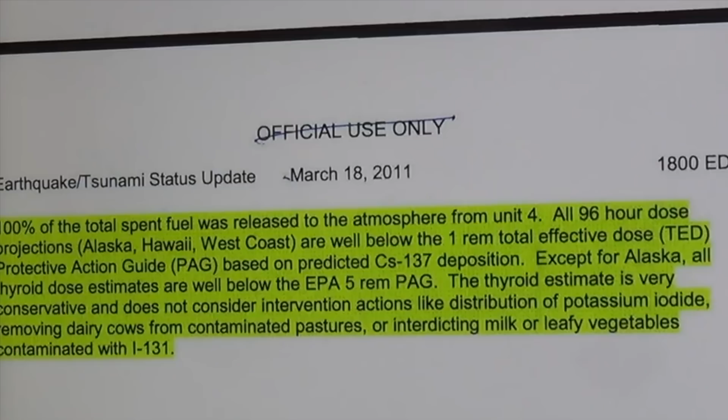U.S. Secretary of State Hillary Clinton visits Tokyo on Sunday and pledges more support to Japan as it deals with the aftermath of the earthquake and tsunami and the ongoing nuclear crisis. In her 5-hour visit, Clinton met with her Japanese counterpart and later with Prime Minister Naoto Kan.

Why is this being downplayed? Is it a liability issue, or do they want to prevent panic? Do you have any ideas why this is being minimized?

I know someone who's very highly placed in the State Department, and the United States government has come up with a decision. I don't know whether it's influenced by a fear of panic or commercial interests or whatever, but I do know that the United States government, at the highest levels of the State Department, as well as other departments, FDA and on, have made a decision to downplay Fukushima.

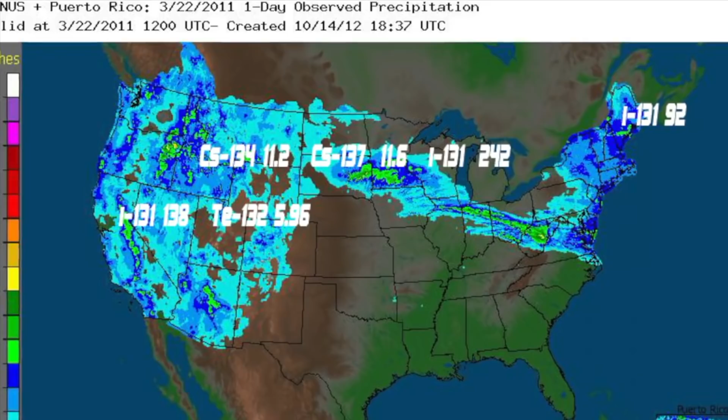I can't speak for the Canadian counterparts, but I will say that back in April, Hillary Clinton signed a pact with her counterpart in Japan, saying that she agreed that there are no problems with Japanese food supplies, and we would continue to buy them. So we are not sampling this material as it comes into the country because our government, the U.S., has made a strategic decision to downplay it. I don't know if that's because they want to support the Japanese government or whether they want to support the nuclear industry, but I do know that that decision was made at the highest levels of government.

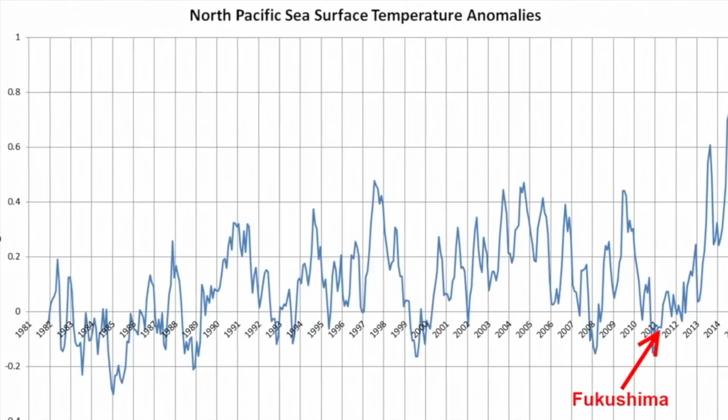What my friends had asked me to do was to talk about our worries and about our ability and responsibility to do something about them.

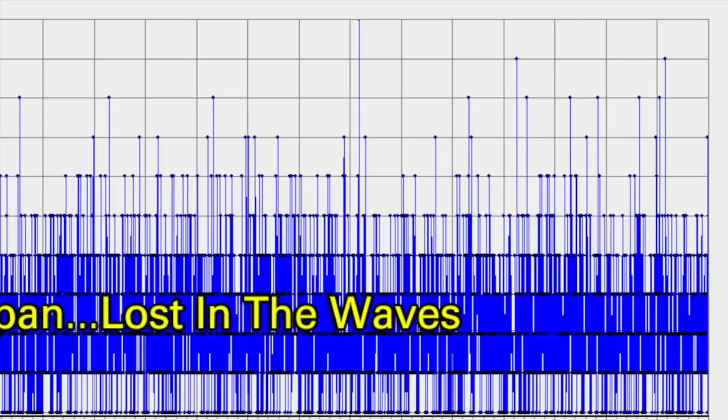Many Americans are also worried about the potential risks to the United States. So I want to be very clear. We do not expect harmful levels of radiation to reach the West Coast, Hawaii, Alaska, or U.S. territories in the Pacific. That is the judgment of our Nuclear Regulatory Commission and many other experts.

In large part thanks to years of heavy casualties and dishonest official statements about...

Furthermore, the Centers for Disease Control and Prevention and public health experts do not recommend that people in the United States take precautionary measures beyond staying informed. And going forward, we will continue to keep the American people fully updated, because I believe that you must know what I know as president.

Why is it that I can show you endless lies, just endless lies, non-stop. That's your legacy. He's never told the truth once, not a single time. Not one freaking time have they told us the truth. Fabrication, misdirections, misrepresentation, and outrageous, deadly, vicious lies.

I believe in you with all my heart. Yes, I did. Well, I don't know why that's funny. I'm sorry. So I don't think it's funny. I can give you a blanket answer. The core, I don't know.

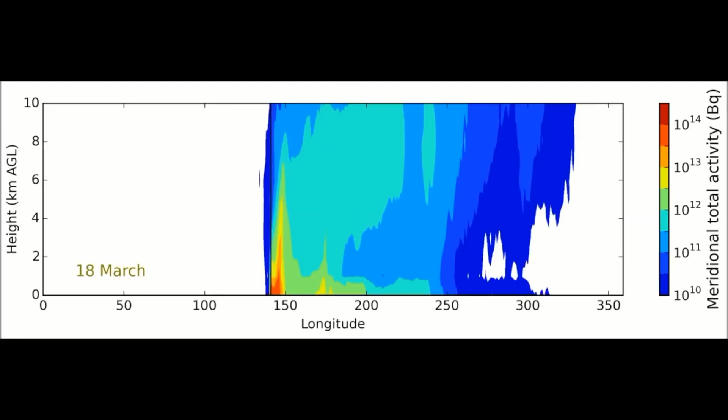And I would like to ask people to stay indoors. There is no mistake that this is a level that can have an effect on humans.

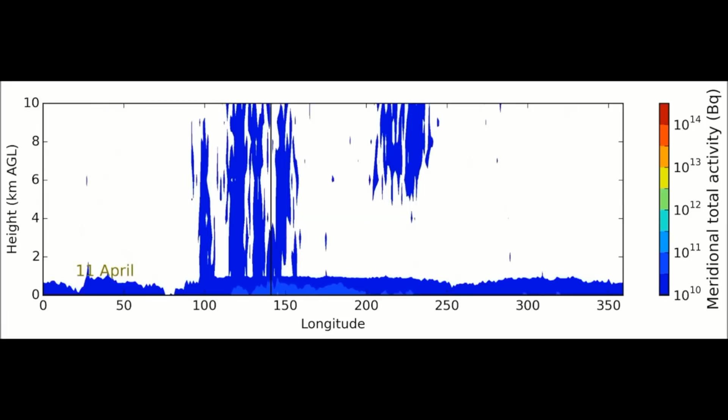Everyone on Earth received the equivalent of an X-ray's worth of radiation from the Fukushima accident. This risk is negligible. I want to be very clear. I think this is accurate.

And I want to say this to the television audience. I want to be very clear. And I want to say this to the television audience. And going forward, we will continue to keep the American people fully updated, because I believe that you must know what I know as president.

I think this is accurate. And I want to say this to the television audience. I want to be very clear. That I welcome this kind of examination, because people have got to know whether or not their president is a crook.